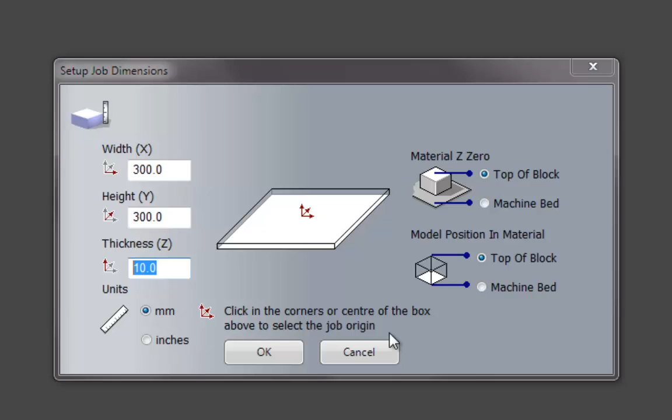Also the model position in the material - that's where a relief actually is within the material. I'm not going to go into that too much because we're not going to create any reliefs or import any reliefs, so I'm just going to leave that at the top of the block. I'm not going to mess with that, and I'm just going to select OK.

And this opens up a model which is 300 by 300 millimeters. Now this at the moment is in the 2D view. You can also switch to the 3D view, which gives you a 3D view of this. At the moment, for this example, I'm just going to be designing all of this within the 2D view.

If you take a look at the icons all down the left hand side here, we have design icons, some measuring tools, some selection tools. At the top is your standard icons like save, open. We also have undo, redo, some vector creation tools, vector editing, relief editing, and you can see underneath all of the toolbars there are actually titles for them, so you know what sort of tools are in that particular toolbar.

Now if you take a look on the right hand side, we have project. This is basically an overall tree of the whole project that you're creating. If you had modules or a higher version of ArtCAM, this would be quite full with different layers, for instance, but because this is the basic version of ArtCAM Express, it doesn't include all of that.

All that you need to concern yourself with in this project is if you click where it says Untitled, this is actually the name of the piece that you're working on. If I select there, it gives me some information at the bottom, so you can see my X and Y is 300 millimeters.

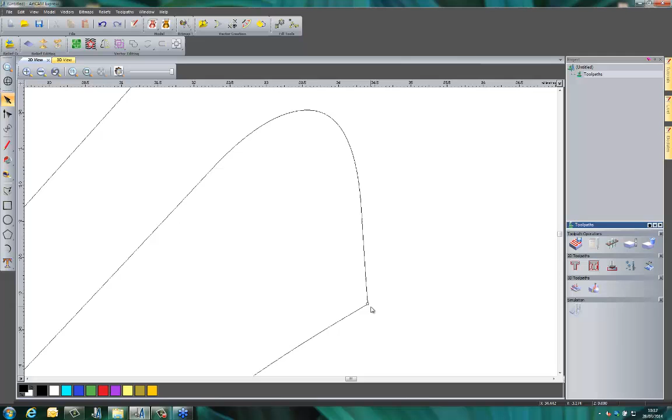So if I just zoom in on the X, you can see there's a little overlap, and this is looping back on itself - this part of the X - and that's giving me a problem. ArtCAM's not going to machine this correctly because it basically doesn't know where to go, and it's going to gouge out the material. So you can fix this manually within ArtCAM, but I'm not going to do that.

I just wanted to show you some of the fonts that you might download from the internet. These have been done by graphic designers who are more interested in the way that they look, not in precision. So be careful of that when you download them. You may need to edit some of the fonts, as graphic designers are often just bothered about the way they look, not the preciseness of them.

Now at the top we have ArtCAM fonts. These are fonts that have actually been edited specifically for ArtCAM, and you're not going to find a problem with these. So all of these are going to work just straight off.

So if I select this engraver, you can change the size of that here if you wanted to. I'm just going to type in ArtCAM, press enter, and then type in Express, like so. Now if I select all of that, I'm going to make sure that it's centered, and maybe drop the character spacing down. Let's bring it down to around about there, and then when I'm happy with that, select done.

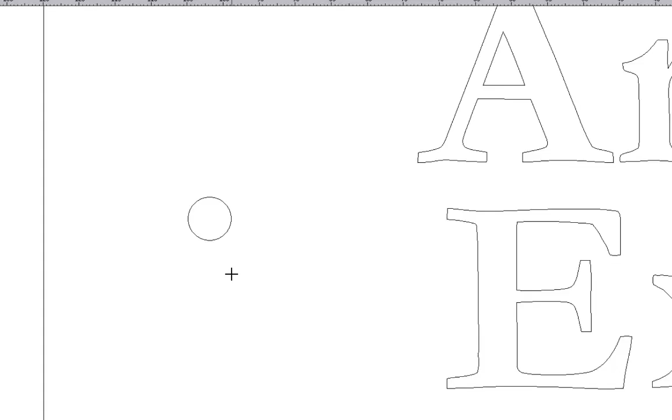So what I'm going to do now is create another circle and show you a different way you can do this. I'm going to snap. Snapping means that the cursor is automatically going to pick up at a specific point - in this case the center, or it could be an end point or an intersection where two lines hit each other. You'll notice what happens with the cursor is that it changes.

So there you can see it's changing to the tangent of the circle. If I move it further in, you can see that that's locking to the center of the circle, so I know when I create something from there, it's going to snap to the center. If I bring that out, let's do this, let's say 10, click create - you can see it's created that circle in exactly the same center as the original circle.

Now what I'm going to do with this, rather than mirroring, is I'm going to copy this. So if I have the larger circle selected, I'm going to press Control on the keyboard and make sure I've got that snap point, the center, and then left click - this will create a copy. So make sure I've got Control down and then snap to the center of the other circle, and that will create a copy in exactly the same place, so it's in the center.

Okay, so that's basically the design done. What I'm going to do now is start machining this.

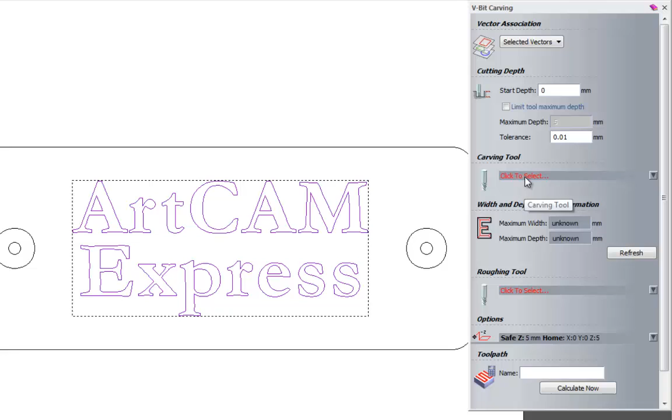Now under Vector Association, I've got selected vectors, so I must select the vectors that I want to machine, otherwise it wouldn't machine anything. And where it says Carving Tool, I'm going to select there, and that will open up our tool database. Now within the tool database we have default tools already installed, and you can add tools to this if you wanted.

So if you wanted to add a 4mm end mill, you can just copy the 3mm and then go to edit, and you can change the name of it, change the diameter, and also change the spindle speed, feed rate and plunge rate.

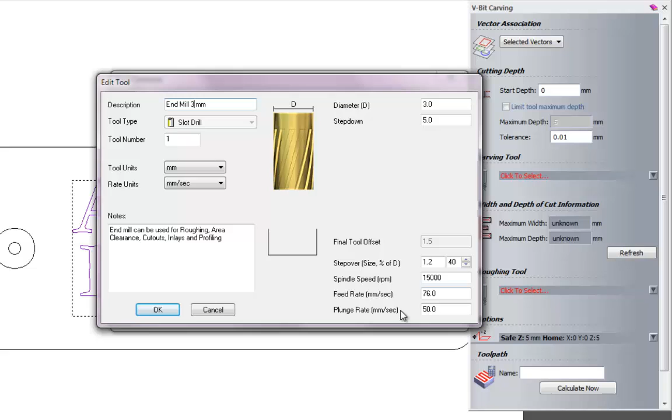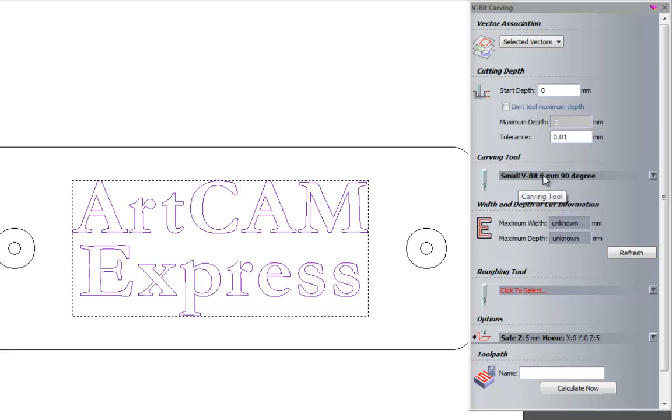So if I cancel that, what I'm going to do is come down and use a small V-bit, let's say 6mm 90 degree, and click select, and that updates here where it says the small V-bit 6mm 90 degree V-bit.

If I select this drop down menu here, this arrow, this gives me all of the parameters for this. So if I wanted to change the spindle speed here, I could do that, or the plunge rate or feed rate. I'm going to go into that a little more in a little while.

Now the width and depth of cut information, this could be quite important, because if I had a large vector that the V-bit was going to go into, this would go down quite deep, so it may actually cut through the base of my material, which is only 10mm thick.

So if I click refresh, it will tell me the maximum depth that this is going to get. So it's going to go down 3mm. So I know that it's going to be okay.

Now a roughing tool, this is basically if you had a really large piece of V-bit to do, you could rough it out before you actually machined using the V-bit, and save ruining your V-bit tool by trying to rough with that, because it's not designed to do that.

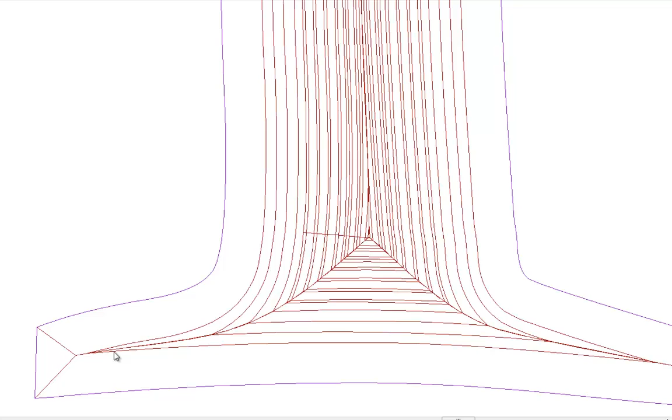Okay, so when you're happy with that, if you just click calculate now, it will give you the tool paths in red. So if I close that and zoom in, you can see these red parts here are all of the tool path. So if I zoom out...

What I'm going to do now is an area clearance over these two circles. Now one thing that's probably a bit annoying sometimes is having to select both of the circles. What you can do is press shift on the keyboard, select both of the circles, and then select here to group, and it groups both of them together so they turn purple. And then when you select one of them, it selects both of them.

So I'm going to do the same thing for the smaller circles and group them together. So you can see those are both grouped together, and those are both grouped together.

Okay, so what I'm going to do now is an area clearance toolpath. Basically what this will do is machine any of the area that's within that particular vector, or this circle. So it's going to machine all of the inside of this. So let's select the vectors.

It asks me for a start depth, which is 0, so it's the top, and the finish depth. So I'm going to do this, let's say 2.5 millimeters deep, and then I'm going to add a tool.

Now you can only add one tool to this within the basic version of ArtCAM Express. You'd need a module to add multiple tools. So basically, if you want to get into smaller areas, you would have to use a smaller tool. But if you had the module, you would be able to do that by adding a larger tool and then consecutive smaller tools.

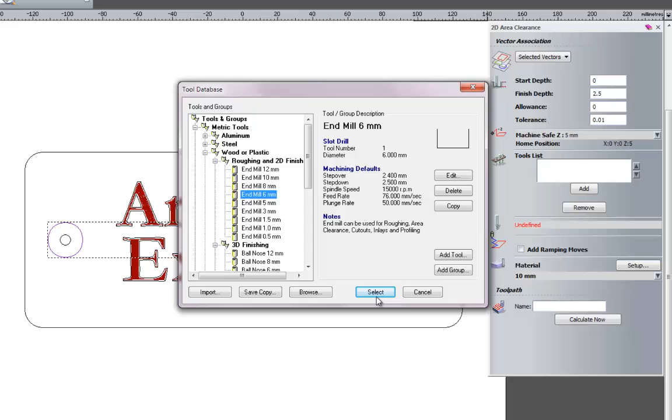So if I select add, I'm going to use a 6mm end mill for this. Click select, and you can see straight away that I have all of my properties for this particular tool. Now you can see the step over, step down, feed rate, spindle speed.

Now the step down is going right the way down at 2.5. So basically what this is going to do is go right down to the depth of my finished cut and then machine it all out.

Now what if I didn't want that? What if I wanted to do it in steps? Let's say I wanted to do it in 0.5mm steps, so it does 5 cuts, cutting around the circle and all the inside, then stepping down by 0.5, cutting all the way around, stepping down again, and doing that 5 times. I'm not going to do that since it'll take a lot longer, so let's just do it at 1mm steps.

Now the tool clearance strategy basically just depends on what part you're actually machining. So for instance, if you were doing a rectangle, you may want to do a raster. Basically what this does is it comes across in Y, steps over in X, and then goes back in Y. It can also be the opposite, going over in X, stepping over in Y, and then coming back, giving you that sort of effect.

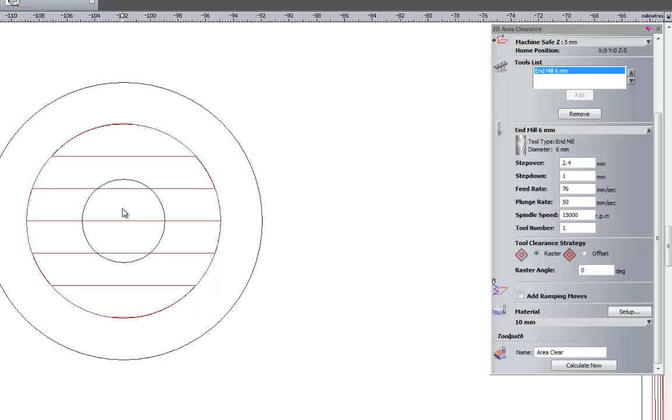I'm just going to calculate this so I can show you. If I zoom in, you can see the red toolpath. So what it's doing is going across in X, stepping over in Y, coming back across, stepping over, coming back across, like so. Now let's change it to offset.

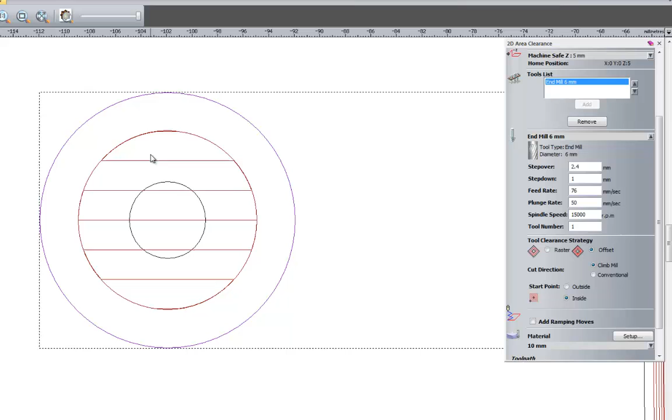What this does is go around the circle and then offset inwards. If I calculate that, you can see it's going around the circle, offsetting inwards, and then going back around again. This is probably better for this particular piece, so I'm going to close the toolpath now.

Now what I want to do is some drilling, just to drill out the centre pieces. Now you can see I'm not too sure what to click on here, it's all looking a little bit muddled up.

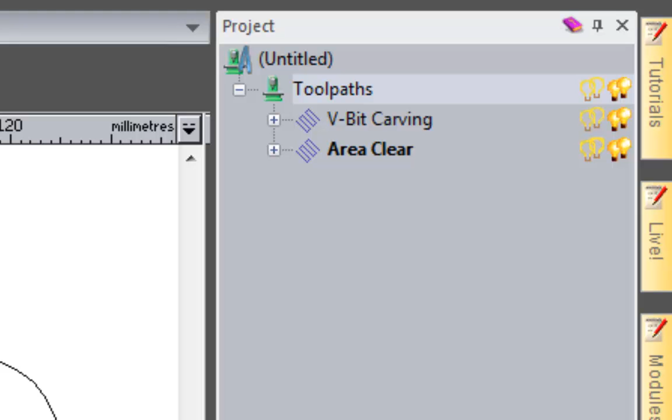So what I can do is select this plus here, which opens up all of the toolpaths I've created - I've got V-bit carving, area clear. Now if I wanted to turn off the visibility of the area clear, I can just select this light bulb. The first light bulb is for the 2D view, the second is for the 3D view. I'm not interested in the 3D view at the moment, just the 2D view. So there you can see that's turned off - turn it back on again, and off.

What I'm going to do is select that circle and click here to create a drilling toolpath. Right, so this is just a basic drilling toolpath. Start depth, finish depth is automatically set to my material depth, so it's automatically going to cut through. I'm going to select a tool - let's do the diameter of the actual circle, which is 6mm.

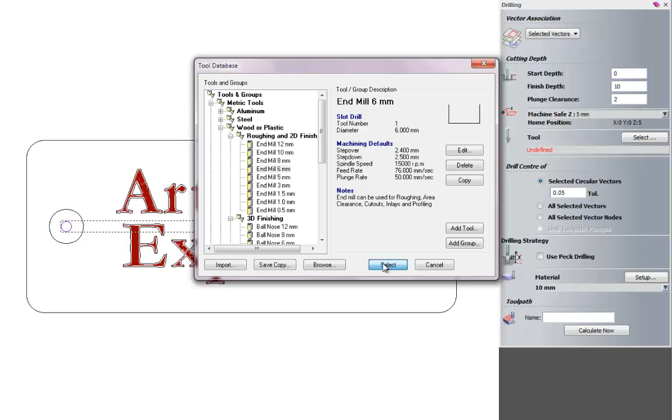And you can also use peck drilling for this. So if you're going, let's say, quite deep, or you're using some material where there's a lot of swarf coming off, you can use peck drilling to break the swarf and retract the drill.

Now I'm not too interested in this because it's just a piece of wood that's 10mm thick, so I'm not too bothered about that. If I click calculate now, you can see it gives me these crosshairs, so that's basically just showing me where it's going to drill. Okay, so let's close that.

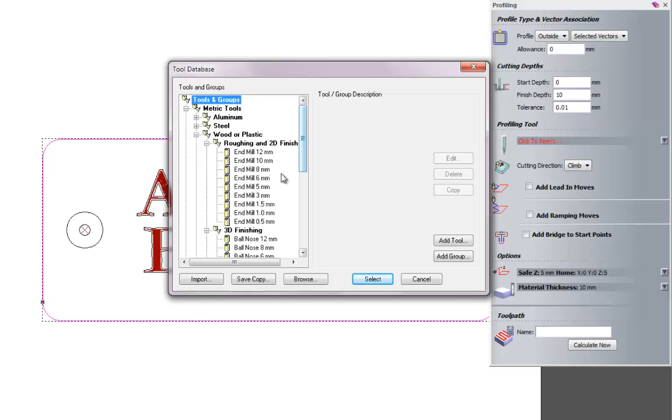Now finally, what I need to do is cut the part out, so I'm going to do this using a profile toolpath. If I select the outside and select here to create a profile toolpath - now the start depth is 0, the finish depth is automatically 10mm, so it automatically assumes I want to cut the part out. I'm going to select a profiling tool, so let's select the same 6mm end mill, and I'm going to click calculate. So there you can see it's calculated the toolpath for me.

Now when you create a profile, there may be instances where you want the tool to not actually plunge on the actual finished path, because sometimes if it plunges it could leave a little gouge in there when cutting the part out. So you may want it to plunge away from the material and then come into the cut - this is what we call a lead in move. If I select that and select add lead in, you can do this linear or as a circular arc. I'll show you what both of those are, and I'm just going to select 25mm as the distance and select calculate.

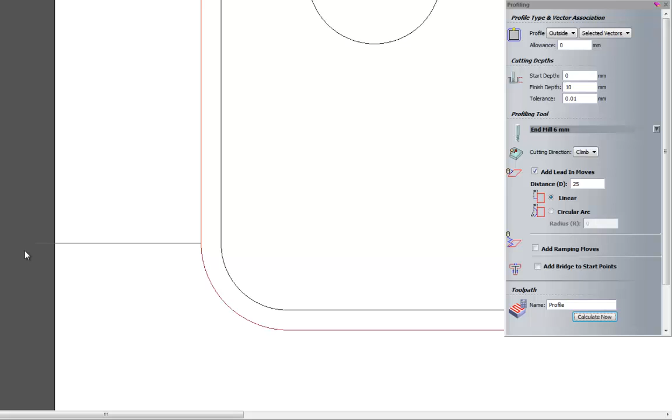Now you can see here that this is coming in, let me just zoom in so you can see. It's plunging off the model and then coming across and doing the cutout.

If I wanted to do a circular arc, let's add a radius, say 10mm, like so. There you can see it's created this arc, so it's arcing into the job rather than creating a sharp 90-degree turn when it actually starts machining. This is probably quite nice for this piece, so it would just arc into it and then start machining.

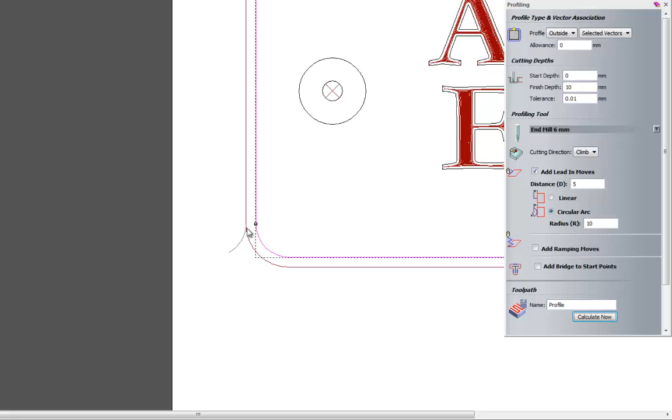Now you'll notice that these are all being placed on the bottom left hand corner. I'm going to show you how to change that in a moment, because what I want to do is add a start point. So let me just turn off the add lead in moves.

Adding ramping moves, this is basically how the tool machines down. So maybe you didn't want this to just plunge straight into the material—maybe you had a hard material, for instance, or there's some reason, maybe it was burning. You could add ramping moves, so basically what it does is go down in a zigzag shape rather than going straight down.

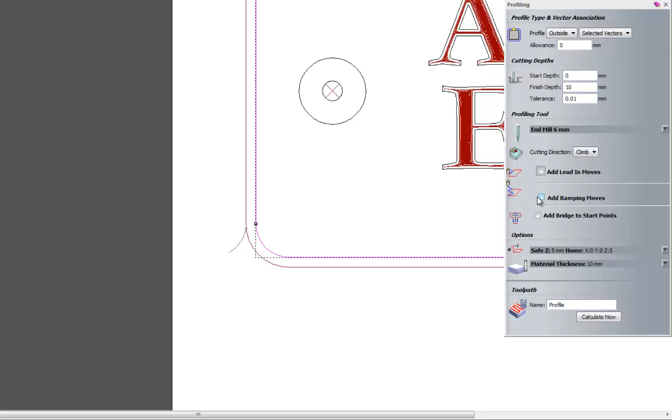You can also add a bridge to the start point. If I select apply, you can see that it's added a bridge here. And if I click calculate now, you can see it's added this bridge. Now bridges, also called tabs, keep your piece in the material so it doesn't fly off and injure someone and ruin the job you're doing. So it holds the piece in the material, just leaving a little amount of material in there so you can break it off afterwards.

Now what you normally do with these is have them on flat sides, so you can file them off or get rid of them somehow. If you had them on, say, a radius like I have here, it would be really difficult to get rid of them—it would take a lot longer than if it was on a flat edge. So as you can see here, this is not the ideal position.

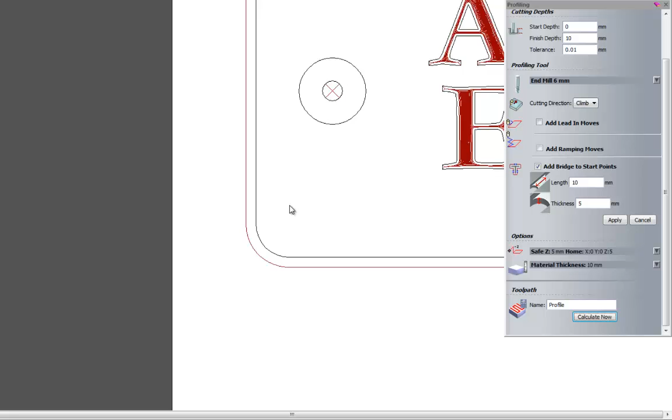Now the reason it's doing this is because it's adding the bridge to the start point, and you can see here that's the start point, indicated by a green node. Nodes are basically points within that line. So what I'm going to do is select here for node editing, and this opens up all of the points that are on this line.

I'm not going to go into this in too much detail. What I'm going to do is right click up here and select to insert a node. There you can see I've got a black node. And what I'm going to do with that black node is right click on it and change it to the start node—you can see that's changed to a green node. This denotes where the start is. So if I close that now and just calculate, you can see it's added this node at the top here.

Okay, so I'm just going to take off the bridges and calculate this again, and then close this. Now the reason I took off the bridge is because when I finish the piece I want to get rid of all the waste material, and I won't be able to do that if I've got a bridge on there, because I want to send this to a customer.

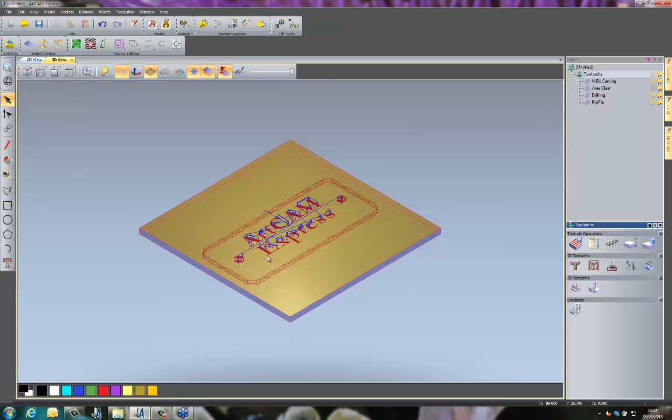So if I close that now, I'm going to switch to the 3D view for the first time. Here you can see all of the toolpaths within the 3D view. Now if you want to see what these look like before actually machining them, if I right click on the V-bit carving and select simulate toolpath, this will give me a simulation of what this is going to look like. I'll do the same for the area clearance, the drilling, and the profile. So there you can see my finished piece.

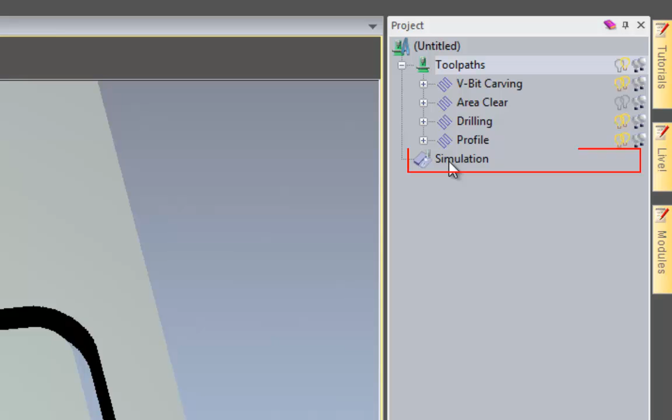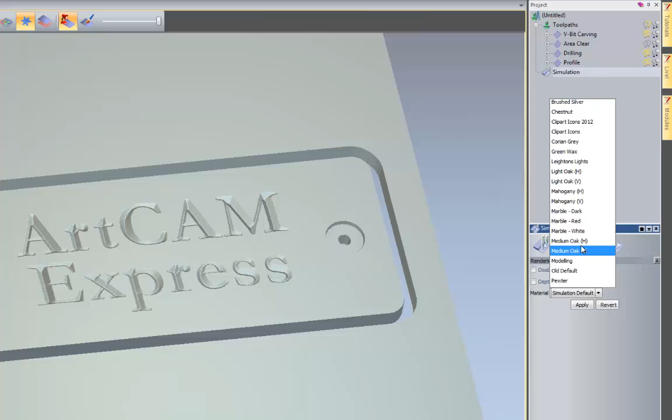Now if I go to simulation by selecting it, you can see that I have this depth color selected. So if I deselect that and apply, it's just the default simulation. But if I were to select simulation default under the material, I can change the actual material of this—so maybe let's change it to medium oak, like so.

Let's try light oak, and I can add a depth color and select apply. I can change that to red.

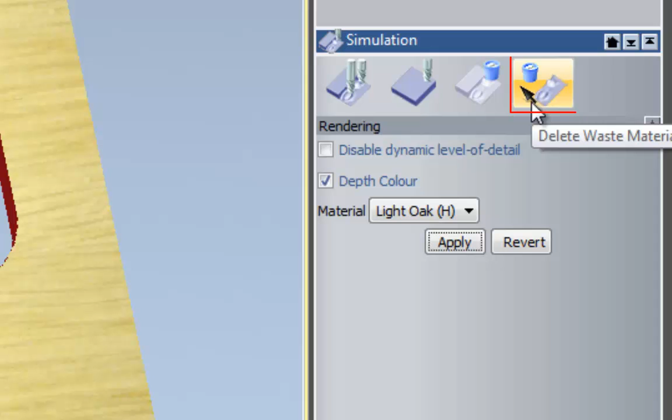Okay, so I can now get rid of the waste material. I don't need that. I can do that by selecting here to delete the waste material, and it automatically deletes all of it. Now I can close that.

Now if I wanted to, I could save this as a 3D PDF to send to a customer. I can do that by going to view and save 3D view image, and then let's go into my folder and save this as a 3D PDF.

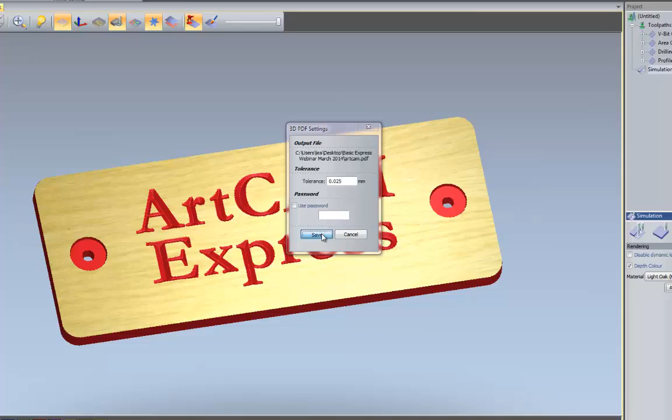Just select save. You can also select to put a password on that if you didn't want people to see this. Now the good thing about this is that you can send this to somebody for approval before you actually start machining things. So they can take a look at this, move it around, and see what's actually going to be machined and how it will look before you actually do it.

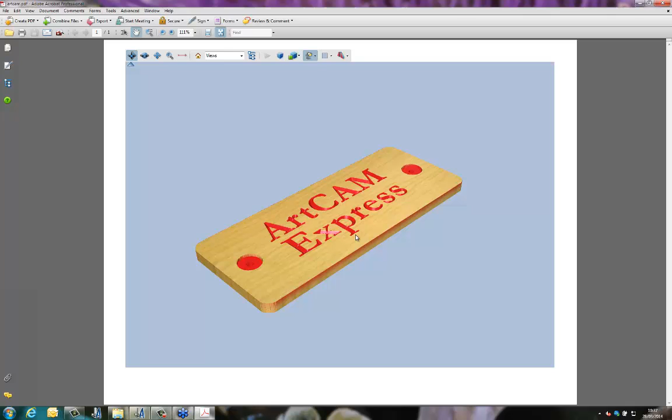So if I open up my folder, as you can see here, and let's double click on that, so you can see I've got this ArtCAM PDF that I just created. So there you can see this PDF. They can zoom in if they wanted to, and see exactly how this is going to look before you actually machine this.

Okay, so let's just close that and minimize that. So finally what I'm going to do is show you how you can save the toolpaths so they will work on your machine.

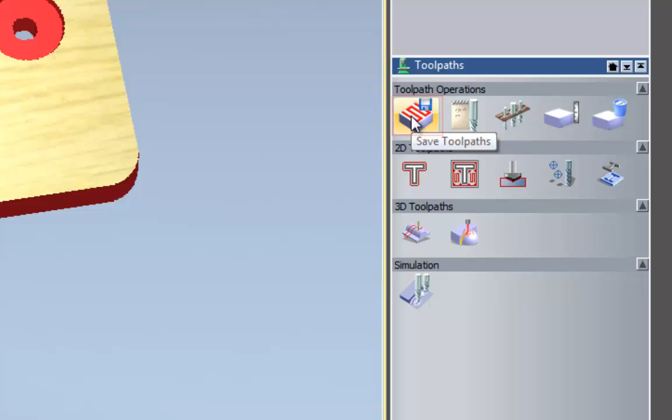So if I select toolpaths and then select save toolpaths, it gives me this dialog box. Now basically what I'm going to do is convert the toolpaths from ArtCAM into a format that my machine will understand, and we do that by using a post processor, and all of those for ArtCAM are located under the machine file format. You can see all of the post processors available to ArtCAM.

This is all of the versions of ArtCAM. Now your machine will more than likely be on here, we also have a generic G code. I'm going to just find that. So if I just go to G code arcs, which is there, I'm going to select that.

Now, if you are unsure whether your machine is supported, then please download the trial version. What you can do with the trial version is go through all of the tutorials, providing that you don't actually change them. You can machine them and output this as whatever machine file format that you like. So you can use whatever post processor that you like, and see if it will work on your machine before you buy ArtCAM Express.

Okay, so I'm going to save the toolpaths to separate files. All of the toolpaths are here, and I'm also going to append the toolpath details. Basically, it puts all of these details, V-bit carving, small V-bit, 6mm, onto the toolpath name, just so I know what they are. I'm just going to browse and find my folder, which is here, and I'm just going to call this ArtCAM Express.